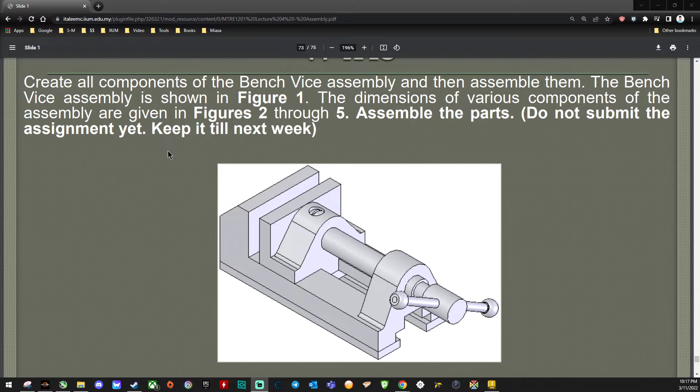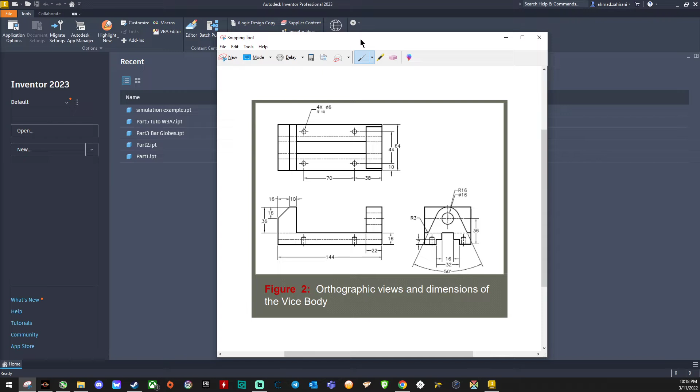This is the schematic of the bench vise. Make sure you can refer to this from time to time to ensure that you are having the right dimension. And before you start your drawing, as usual, please be aware to change your unit from inches to mm. So let's get started.

Select the XY plane and select rectangle. And the dimension should be 144 by 16.

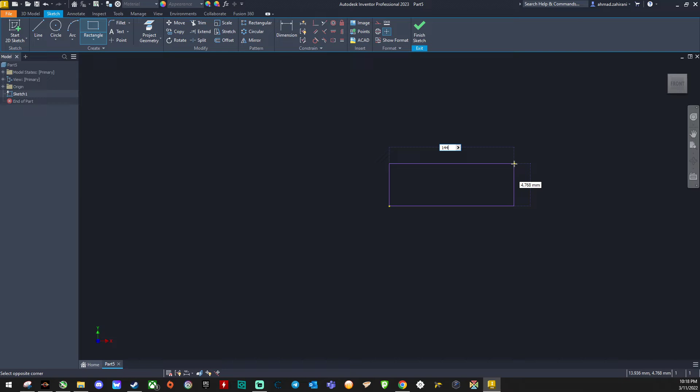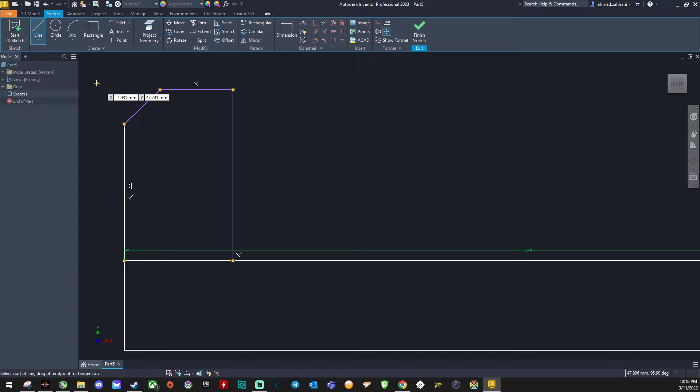And then additional line on the left hand side of the drawing. Just draw them randomly. Then after this we'll be using the dimension function to assign the correct dimension to the drawing.

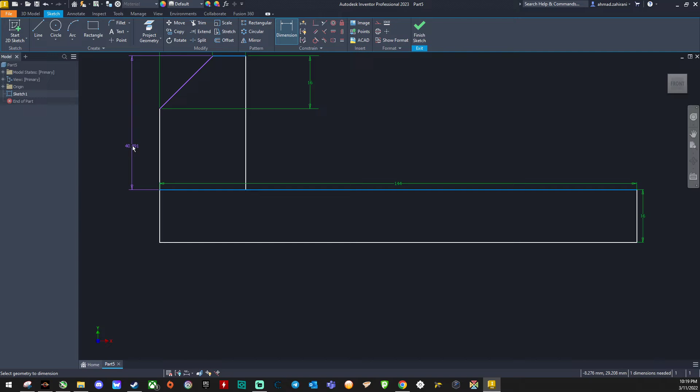This is 10. This one to over here is 16. This one to over here is also 16. And the top to the center or to the bottom is 36.

And then trim. Select trim this part. And then extrude the drawing with the value of 64. Select OK. Move to the right view using this cube over here.

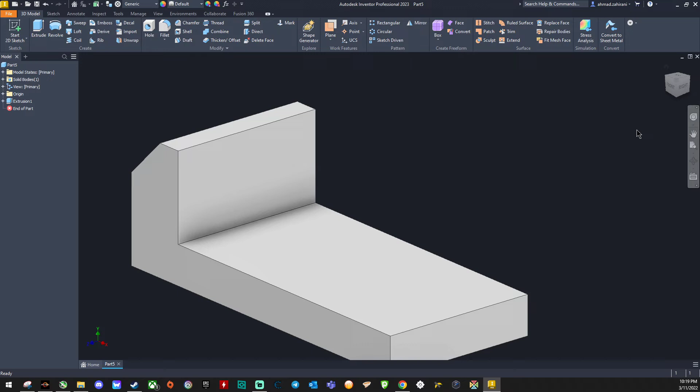Click the right view and then right click at the bottom part and select new sketch. Start with the center line. And categorize this one as construction.

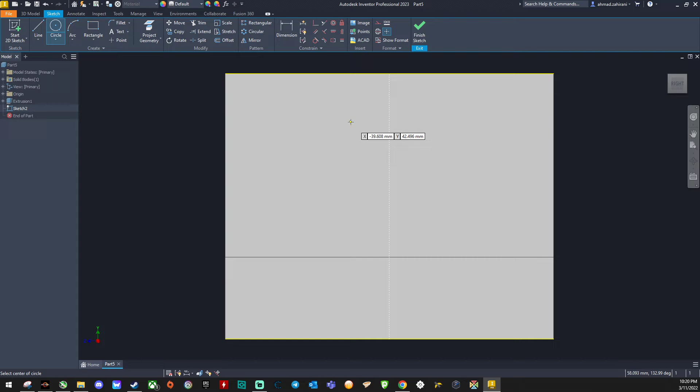Select circle and draw a circle of 16 diameter. And the distance of this circle from the center to the top is...

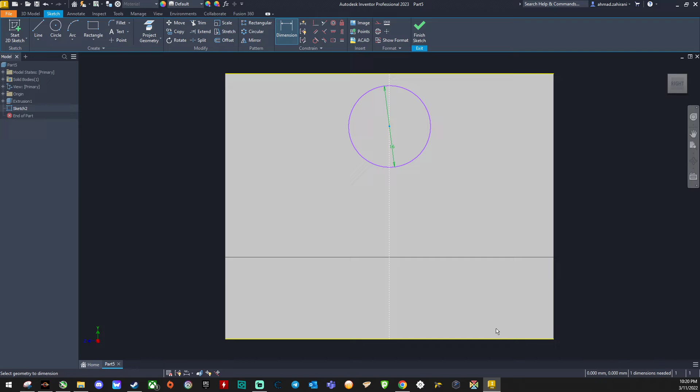I think it's better if you can make it from the bottom. Dimension, this one to the bottom is 36. And then click circle, create another circle with the same origin, which is 32.

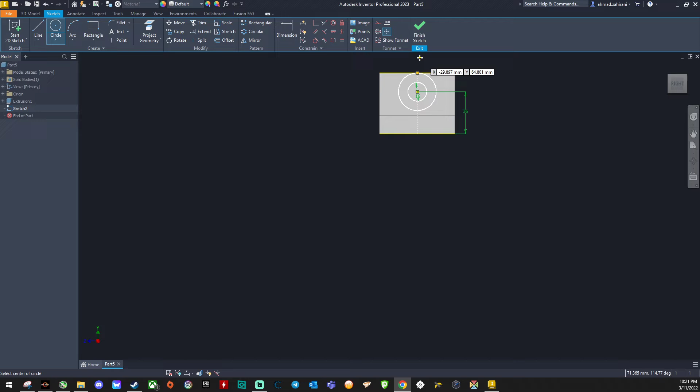Then we zoom out a bit. And create a line from the center going upward.

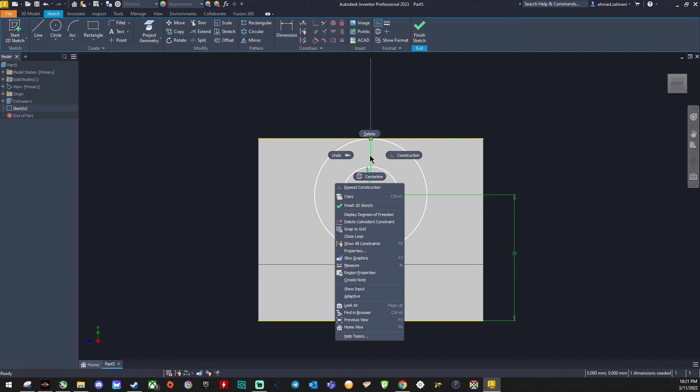And also categorize this as construction. Make sure you properly select the line and select construction. Otherwise, it might cause you problem later on. And then this circle, you want to make sure that the color is black or fixed. So click apply.

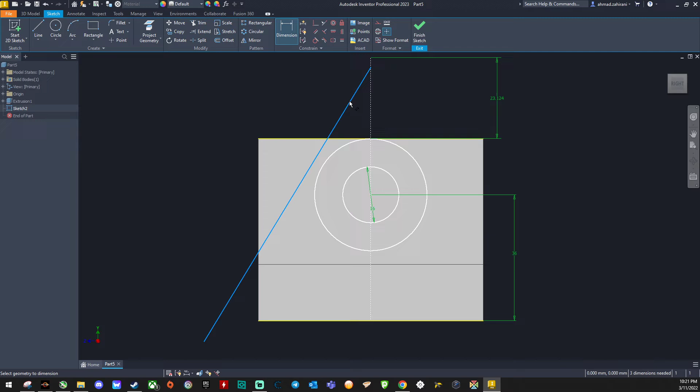And this one, try again. Okay, I think it's already fixed. And using the function line, from this construction line, take it down to somewhere over here. Select OK. And then using the function dimension, the angle between the solid line and the dotted line should be 25. And press enter.

And then using the function constraint, select tangent, select the line, and also select the circle. After you select both components, you can see that the icon over here appeared, meaning that the line that we drew earlier is now tangent to the circle with this 32 diameter.

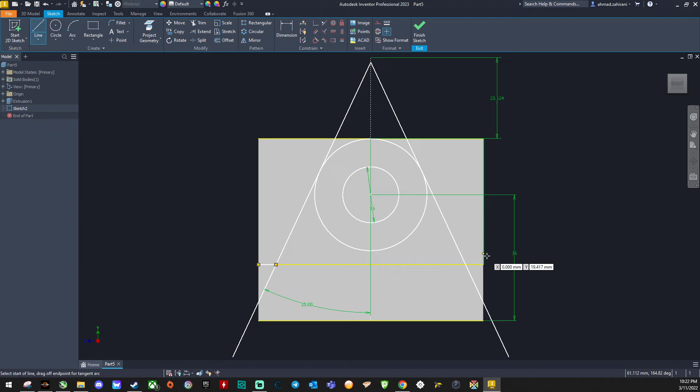Using the function mirror, select this line, select mirror line, and then select dotted line and apply. So another line appears on the right hand side of the drawing, and then select line from this side to the intersection, and opposite also the same to the intersection. Select OK. And then using the function trim, we remove the unwanted lines.

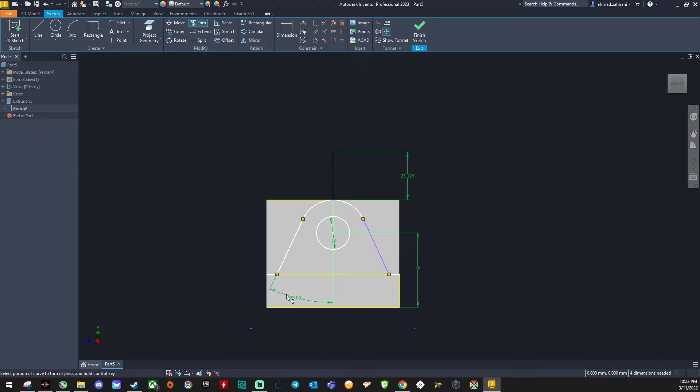And then using the function fillet with the 3 radius, click this line and this line, this line and this line over here.

So select the home view. Make sure that the sketch that you are having is at the front of the right hand view. If you draw the sketch at this surface, then it will cause you a bit of difficulty to ensure that the extrusion falls at the right place.

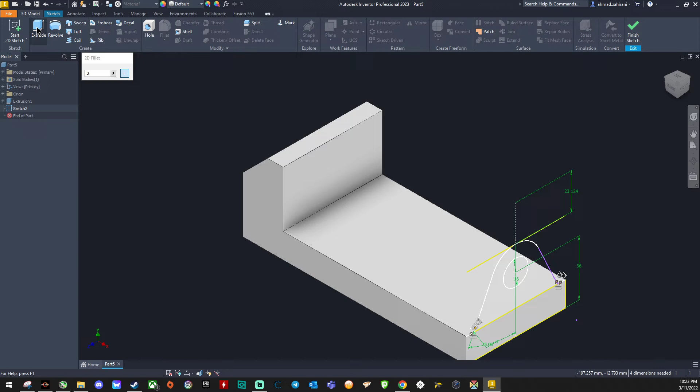And then select 3D model, select extrude, and select this surface. You can see that the direction of the extrusion is on the wrong side. Click the direction, flip, and the length is 22, and select OK.

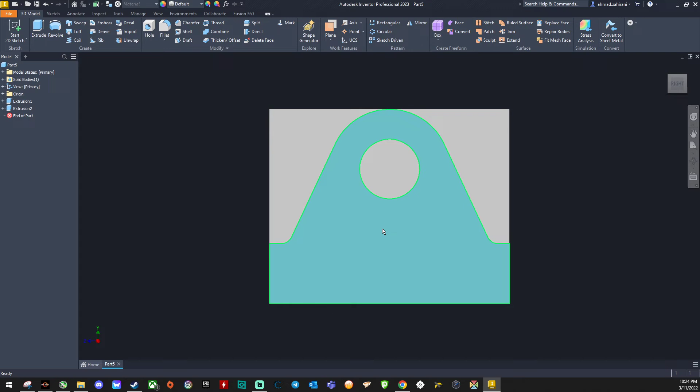Now right click at this surface again, the right side view, and select new sketch. Again, as usual, to make your drawing easier, always start with the center line. Right click and categorize this as construction.

And then what we want to do is sketch this one, and we want to cut at the bottom part of the vice body.

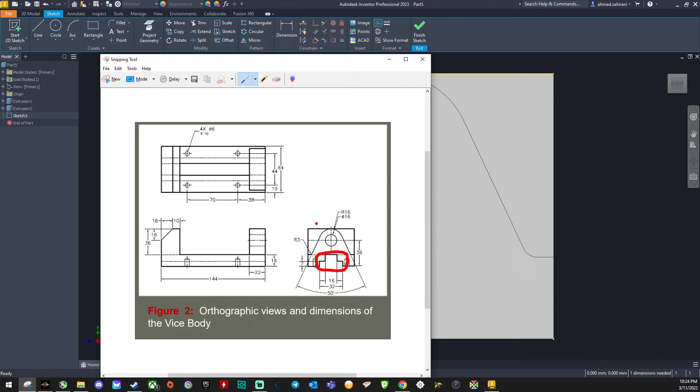So select the function line, and you should start over here. Move your cursor, do not click it yet until you reach the dotted line over here. Go to the right, the value should be 8. Press enter, then go down. I believe the value here is 9. Press enter.

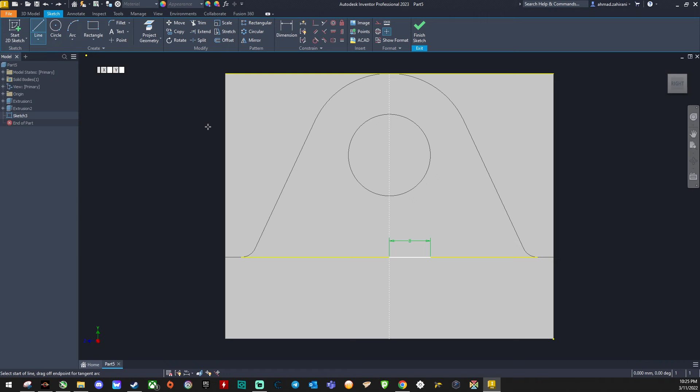Okay, it's a mistake over there. Undo, escape and undo. Line going down, which is 9. Press enter, and then going again to the right, which is 8. Press enter, and going down until you reach the bottom.

Right click, select OK. Using the function mirror, select these 3 components and select mirror line, select the construction line, and click apply. Click done. Make sure you complete the shape so that you can cut.

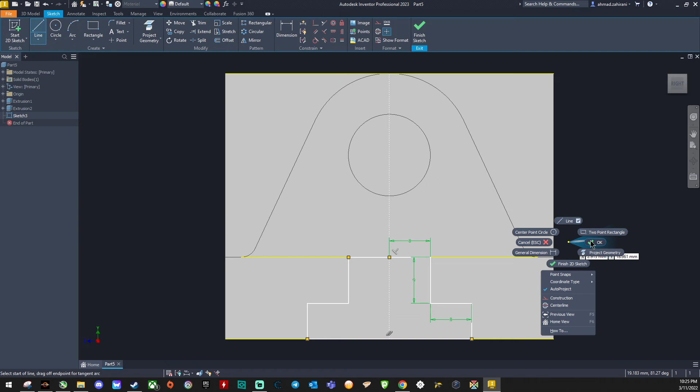Right click, select OK. Go to isometric view, 3D model, click extrude. Again, the direction of the extrusion is on the wrong direction. Click this flip, and you can see that...

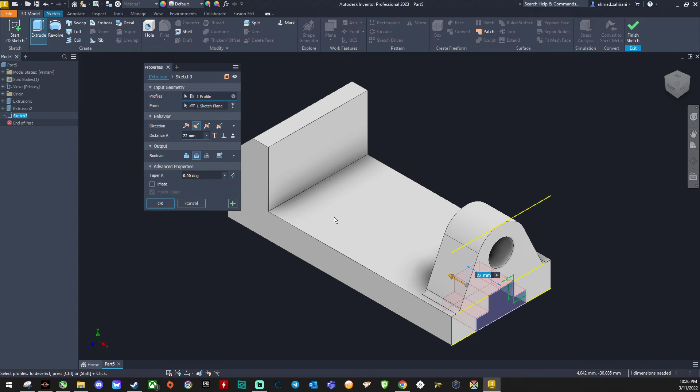The direction of the extrusion is now cutting through the body, and we want the cut to be all the way. So select through all, distance through all, and then you can see that the cutting is going all the way until the end of the product. Select OK. So we are almost done.

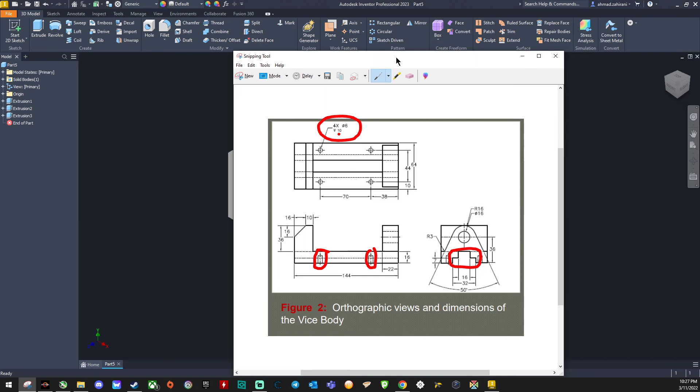It's just that if you look at the schematic, there is this dotted line, and there are 4 of this. 4x meaning that there are 4 components of this circle, with the diameter of 6 and the cut of 10. So that's how you should read the numbers.

Okay, so let's move on to the bottom part of the drawing. As usual, I always start with new sketch, line, and always start by building the center line. This one is at the center, and categorize this one as construction.

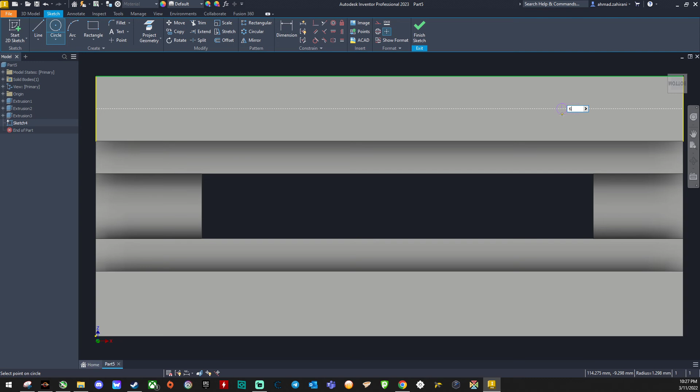So we know that the diameter is 6. Just draw on this line with 6 diameter, and then there is another one similar, also 6. Press enter, and then using the dimension function, the length of the circle to the front is 38. Press enter, and then the distance between this circle is 70.

Press enter, and then create another center line. So you move your cursor approximately to the center of this position, and you can see a green dot appear, indicating the location of the center. Just click and make a straight line to the other side.

Right click, select OK, select the line, right click and select construction. Select mirror, select the circle, and then select the mirror line, and select apply. So you can see now we have 4 locations of this circle.

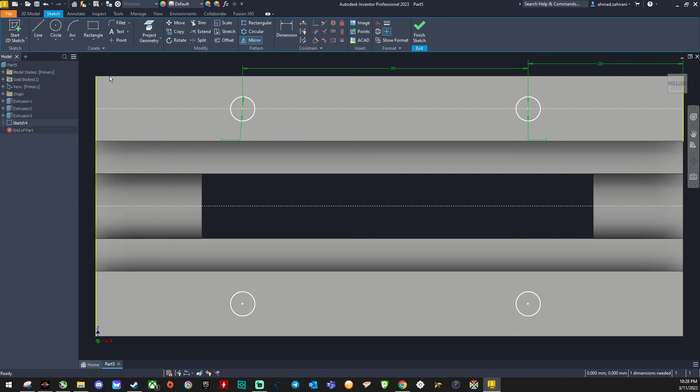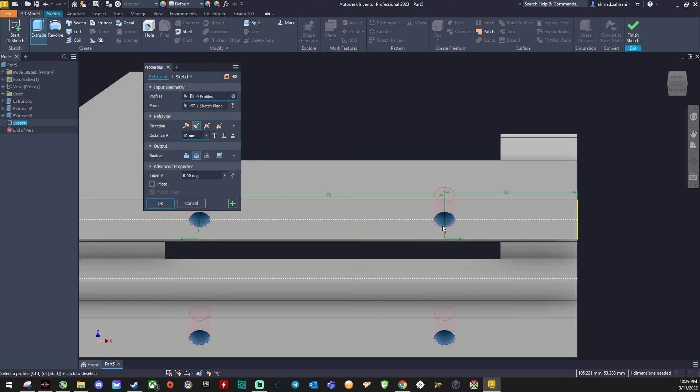Select done. Select 3D model, extrude, and select this circle, all 4 of them, and choose home to see the isometric view. But you can see that the direction of the extrusion is not in the right direction. As usual, click the function flip, and now you can see that it is cutting inside the material. The length or depth of cut is 10, which is correct, and select OK.

So this covered the first object that you need to draw for this assembly assignment. So I'll see you on the next video.